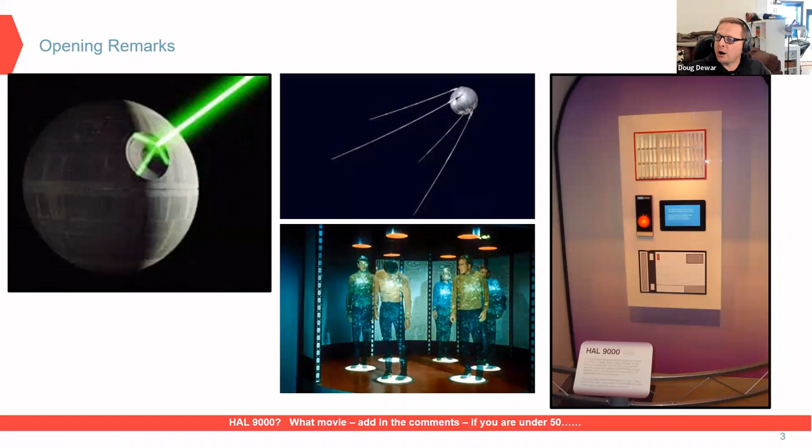There's been dramatic changes over time with geotechnical engineering. And I'm pretty lucky where it's happened over my career, because now we're harnessing the power of lasers, computing, satellites. And we can beam information all around and over the place now, so we may not even have to go to site.

Okay, so today's story starts back in 1956, when an engineer, Doc Hardy, was putting in a right-of-way for a new pipeline in British Columbia.

Back in the day, we did not have the understanding of landslides that we do nowadays. And particularly with new technologies, what we can see is amazing. We can actually see through the trees now.

So if you look at this, I'm sure if Doc Hardy had this information back in the day, this pipeline would have been routed around this deep-seated landslide. Just for reference, this is a couple kilometers long and a couple of kilometers wide.

Just to let you know, Doc Hardy's real name is R.M. Hardy. There might be an award or something. Apparently, he's slightly prestigious.

So let's go to 2019 now. I found it quite interesting where I'm out on a site with what I consider to be a very excellent engineer I work with, who's younger than me, as most people are nowadays. And he looked at me and said, 'How did you do it back in the day?' My reply to him is, we did a lot of walking and a lot of geotechnical theorization on landforms. Okay, now let's go to today.

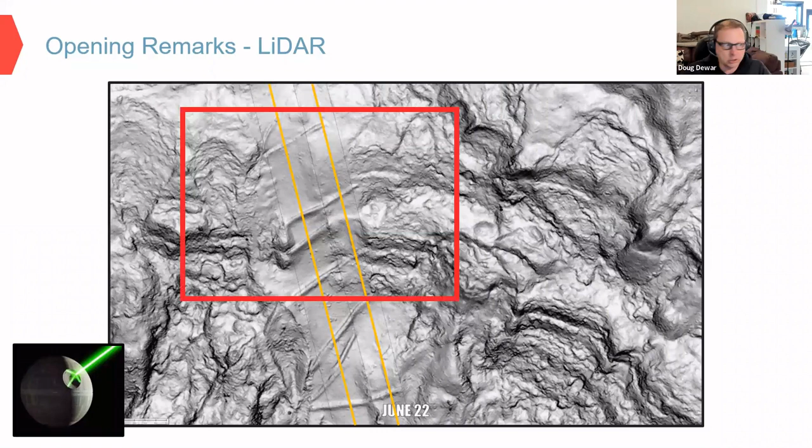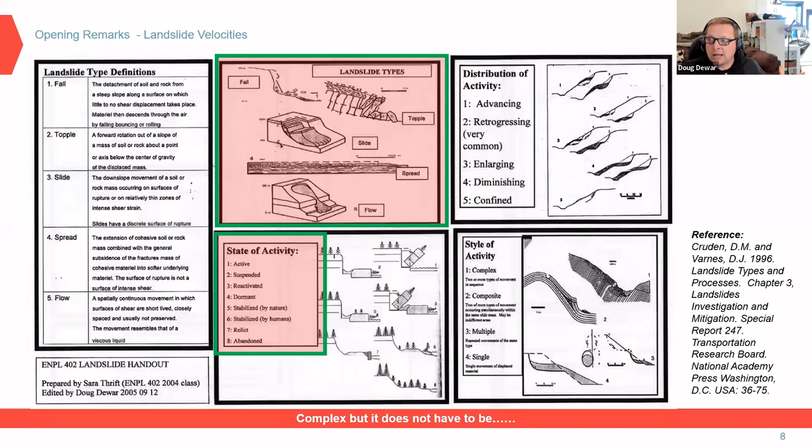So what's happened over time is we've shifted from a focus on whether we have a landslide and what type it is, to what is the state of activity of the landslide, using Cruden and Varnes 1996. So the question is: is it active or inactive? And if it's active, we're concerned about how fast it's moving, and for pipelines, the cumulative displacement over time.

Over the life of the pipeline.

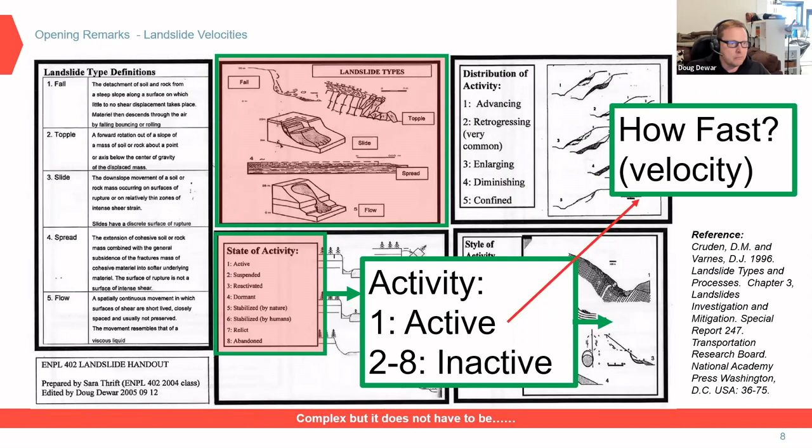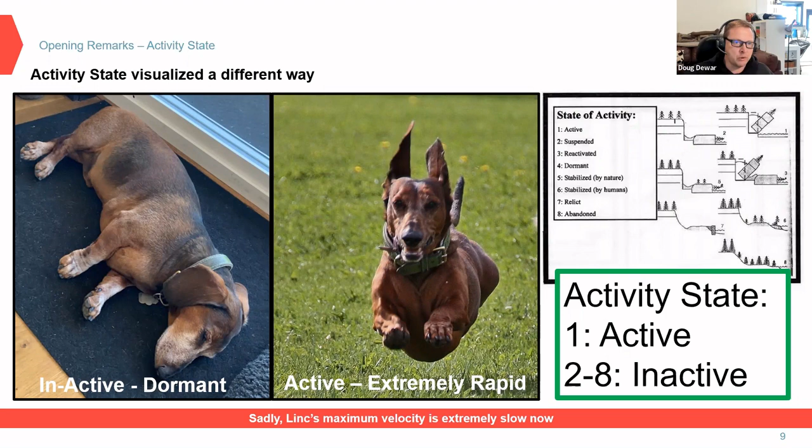As part of the big picture for this, I've come up with a soil-to-pipe landslide interaction classification system. The main elements are: do you have a non-interacting, exposing, or interacting landslide? And further to that, the main theme is whether these are maintenance issues or fitness for service issues.

Now, I'll point something out in the system: I put exposing in there because of regulatory requirements and regulatory compliance. Some exposed pipes may be fitness for service issues, where others are a maintenance issue.

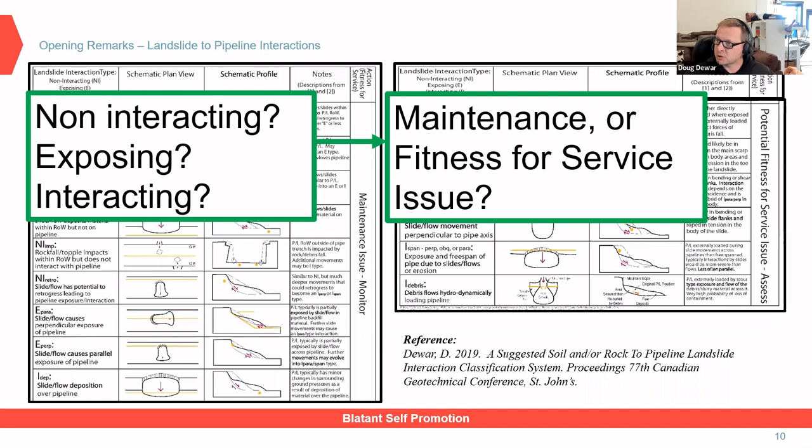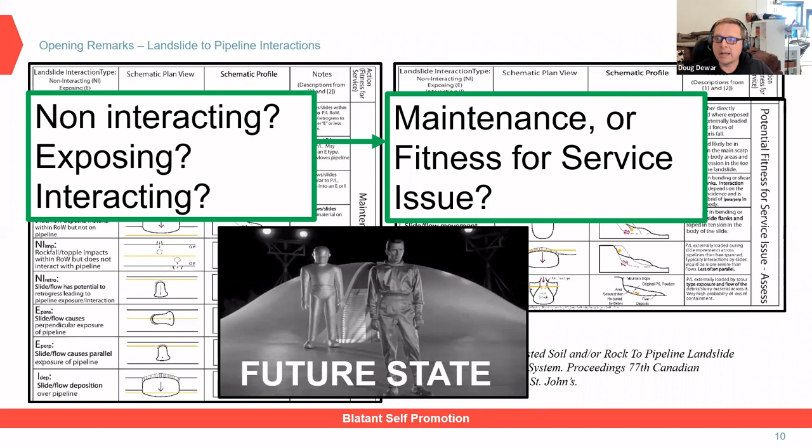And of course, within any system like this, you want to predict the future state of this landslide and its interactions with your pipeline as part of your geohazard management program. So I'm going to give you three examples, just to kind of warm you up a bit.

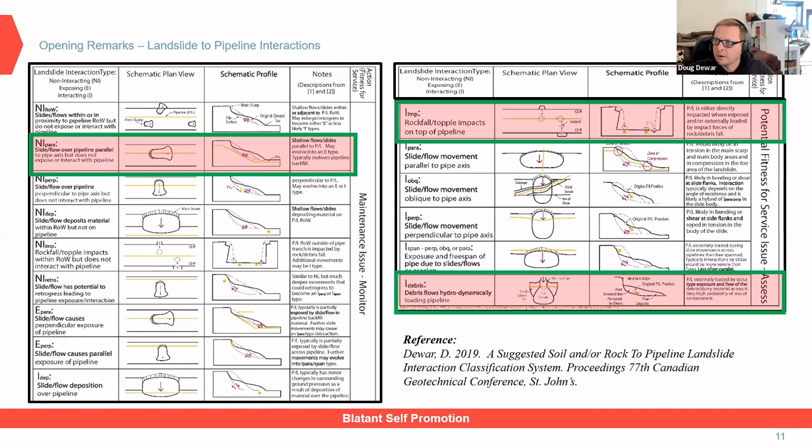In the first one, we have a non-interacting earth flow, residual soils in the Appalachians, where the landslide does not intersect with the pipeline, the slip surface is above it - likely a maintenance issue.

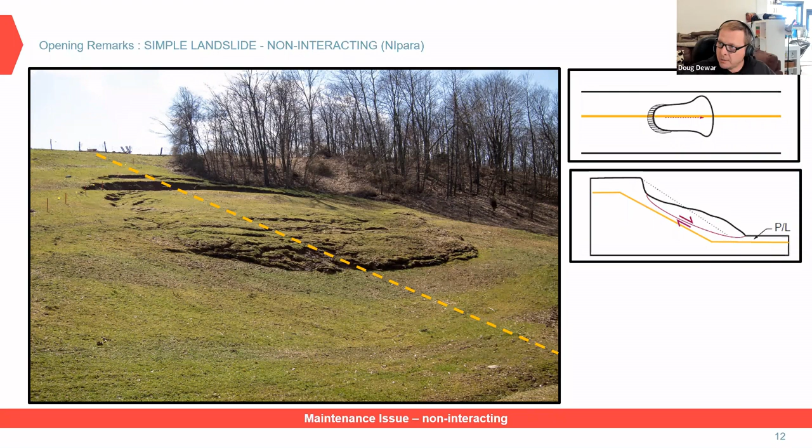Then we go on to this, which I call in my system an 'I-imp.' We had a rock topple, which you can see in the before and after photo here - left before, center panel after - where we've got deposition of a rock topple, which breaks up and hits a pipeline right away.

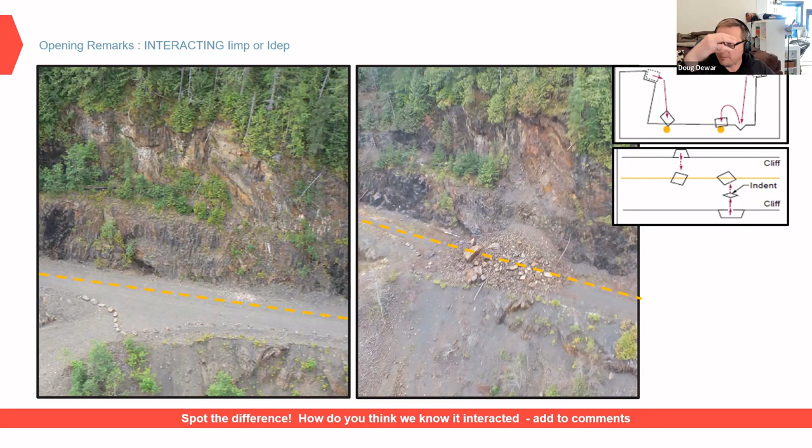Now, there's a little quiz for later. So if anyone in the comments knows how we would assess the fitness for service of this, just put it in the comments to see if you get it right.

And then of course we've got what I call an 'I-debris,' also called an IPA, or an interacting pipeline Armageddon event. So what you've got here is a rock slide up high in a mountain, which turned into a debris flow, which came down and ruptured the pipeline.

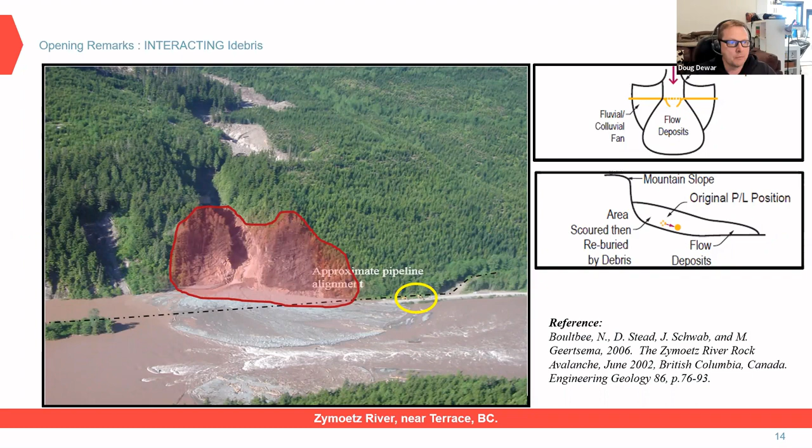Now, let's switch now to the focus, which is velocity. Really for landslides, it's the extremely slow landslides - the Cruden and Varnes example - or very slow landslides that we typically find pipelines in. Pipelines, duration based on velocity, can survive in these landslides for a certain amount of time. But for a conventionally buried pipeline, typically they'll only last for any time in an extremely slow moving landslide.

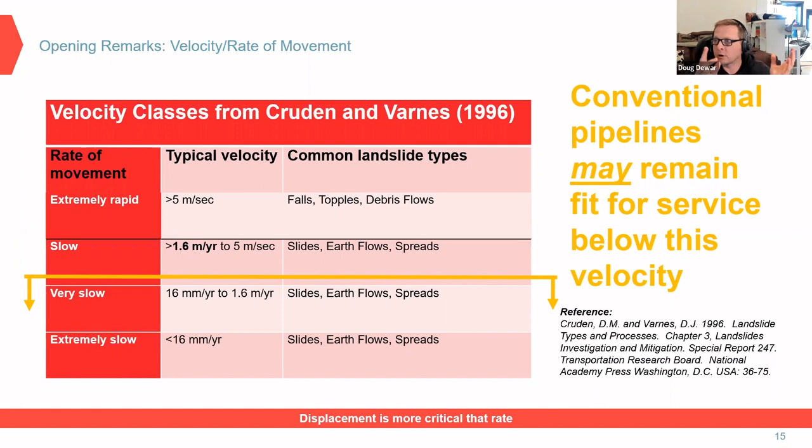And I think there's going to be some work done on this in the future by an engineer named Mike Porter of BGC, who's done some great work on this and goes into much more detail. I think hopefully it'll be presented at IPC this year.

Now, if we look at pipeline features - this is just for the non-pipeline people - it's pretty simple. Pipelines are made by having a flat plate of steel, which is then formed, and it's welded along the long seam. Then when it gets into the field, it's welded, and those are the girth welds.

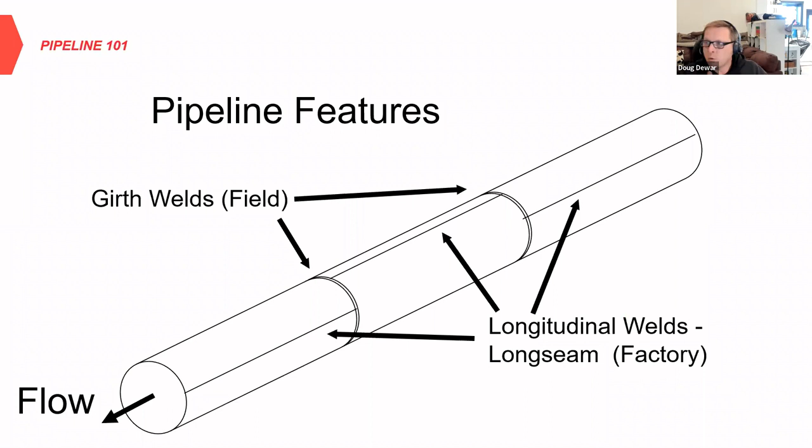Now, for those that are pipeline folks, I should mention slope inclinometers too. Kind of similar, where you have a plastic pipe, typically a 10-foot joint, and there's probably a billion different types of commercial connections for these. You put a probe in it, and you're basically profiling it using angles.

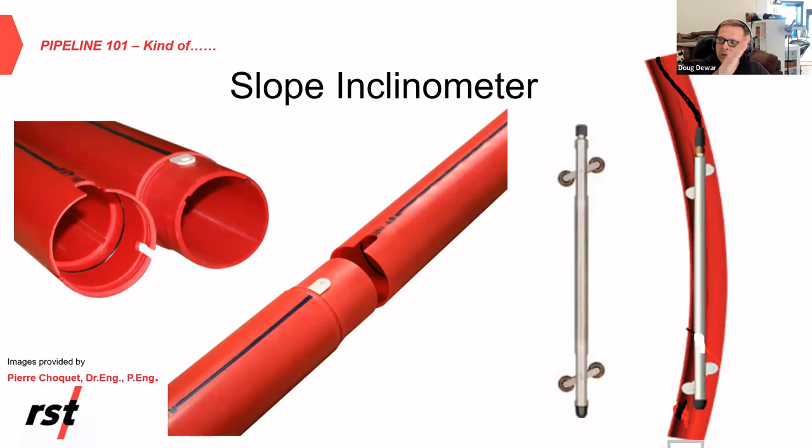Okay, so don't worry for the geotechs, I'm not going to really tell you what you already know, but I'm just going to give you my opinion on traditional geotechnical ground monitoring.

So obviously there's visual monitoring, there's subsurface technologies, mainly slope inclinometers, which I'm going to talk about quite a bit today, and surficial technologies, which are conventional or GPS surveys, LiDAR, and InSAR.

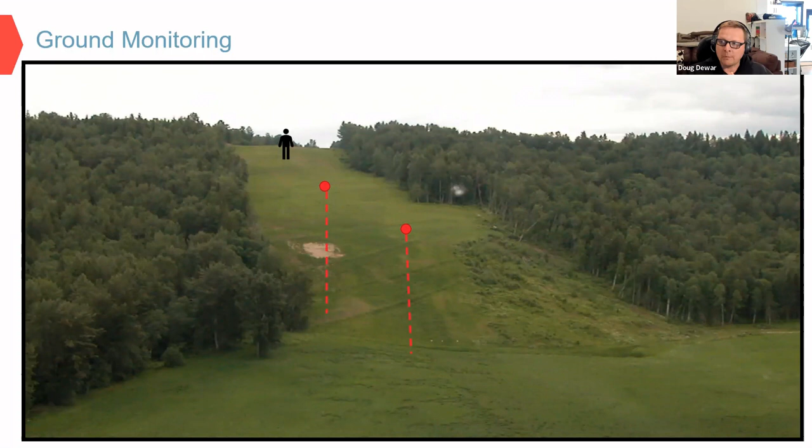So for those non-geotech folks, a geotech shows up at one of your pipeline slopes, and they can do some visual monitoring and walk around and look at the pipeline. Often they'll recommend putting in slope inclinometers to characterize the movement, and particularly the depth of the movement, and they get indications of the rate of the movement from the slope inclinometer.

And then what a lot of geotechs will do is put in surface survey monuments to give you more coverage on discrete areas of movement.

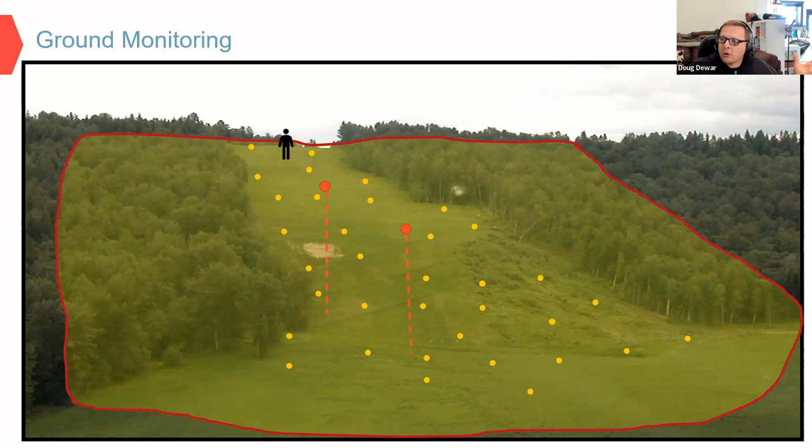And with the new technologies, we can scan an entire area with either LiDAR or INSAR to give us ideas of rates of movement over the broader area, and give us more indications of the slide activity over a larger area.

Just advice to all geotechs: nothing gets a VP's interest more than the photo of a split tree at a landslide scarp, okay?

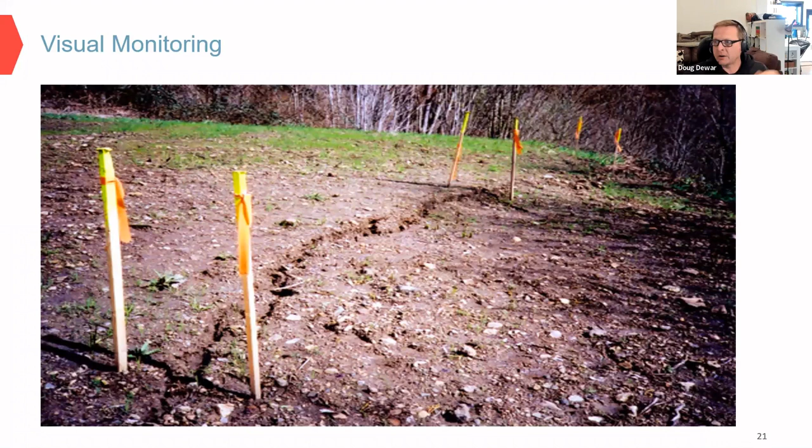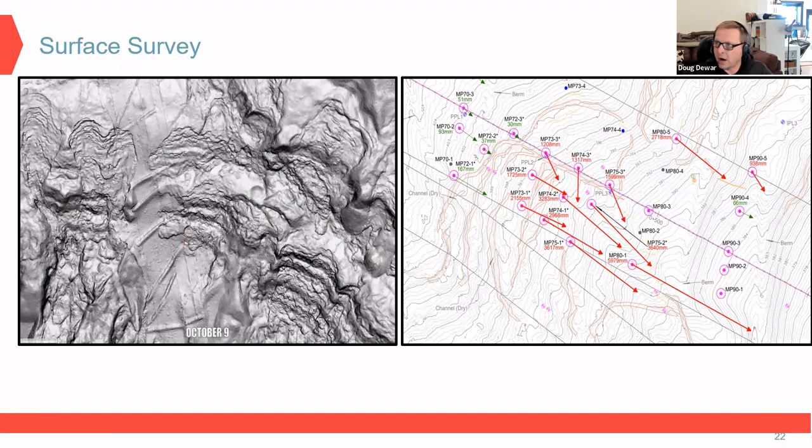Now, typical visual monitoring: put stakes down or whatever and monitor rates of movement. We've all done it and we'll all continue to do it. But now let's look at surface survey. If you look at the panel on the left, that's LiDAR; on the right, that's the surface survey of it, and it's providing very reliable results.

Here's an example of a large landslide complex, I think it was the RM Hardy one I was talking about before. You have clearly drift in GPS monitoring points in the right panel, and the left panel shows indications of clear movement. Here we got up to 620 millimeters of movement, with an average rate of about 2 inches a year.

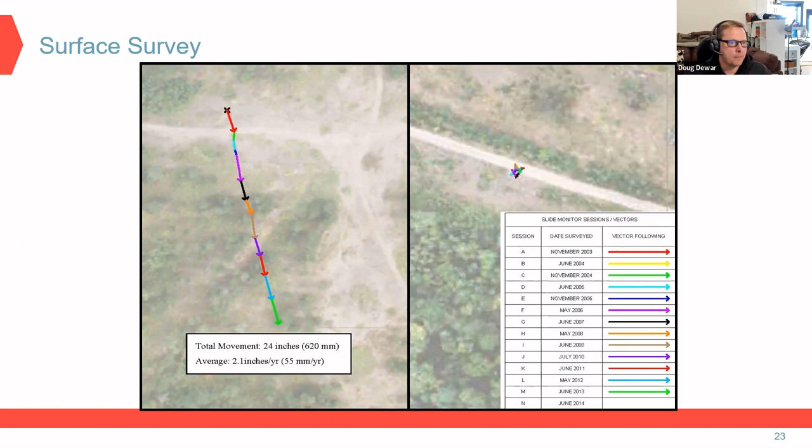So now the technology's evolved to the point where we can actually put GPS survey monitoring hubs real time, for pipeline applications. Those arrows on the panel to the left show real-time monitoring areas. This is a surface pipeline segment that was part of immediate risk control measures, as there was a landslide interacting with a pipeline. This is a temporary measure waiting for an HDD to happen.

If you look over to the panel on your right, what you actually see is the GPS survey monitoring hubs, near real time, monitoring the structure and the pipeline.

Oh, don't want to do that.

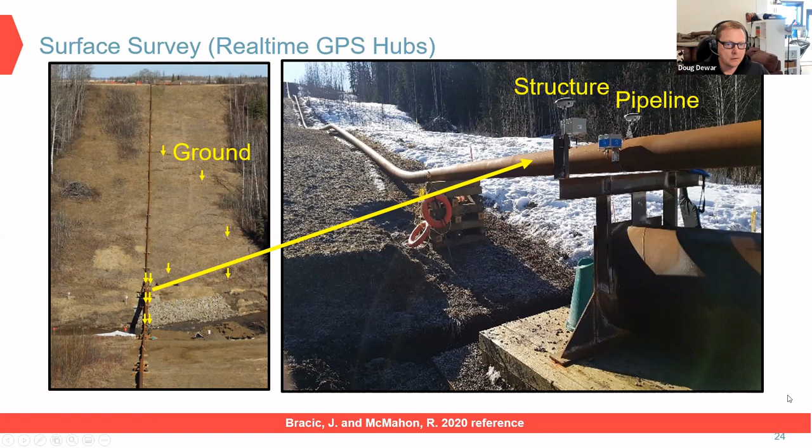Okay, so now I want to make a point about surveying to the geotechnical audience. I think there might be a little bit of surface survey hesitancy amongst some very senior geotechs, or amongst us all, because I don't know a geotechnical engineer over the age of, let's say, 45 that hasn't been burnt by a surface survey type monitoring installation in the past.

But I want to put it in a pipeline context for you. Basically, your strain capacity of your pipeline, based on my experience, is going to be an absolute minimum of 1 to 3 diameters of movement of your pipeline when buried in soil.

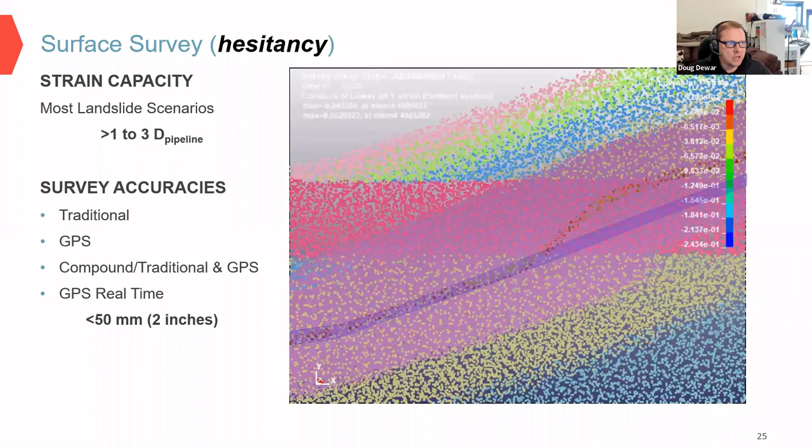Okay, let's talk survey accuracies. Whether it's traditional, GPS, or compound - meaning you have to use traditional and GPS together because you can't get the horizon for your satellites to completely go GPS because of trees, etc. - and GPS real time, worst case is you're going to get an accuracy of plus or minus 2 inches. Now remember the strain capacity of the pipelines.

The surface survey pin is a 3/4 inch sucker rod, 6 feet long, hammered in by some gorilla, not me. And it goes from 0 to 1 meter. The pipeline's buried at 1 meter. So what's closer to the interaction, the SI or the monitoring pin?

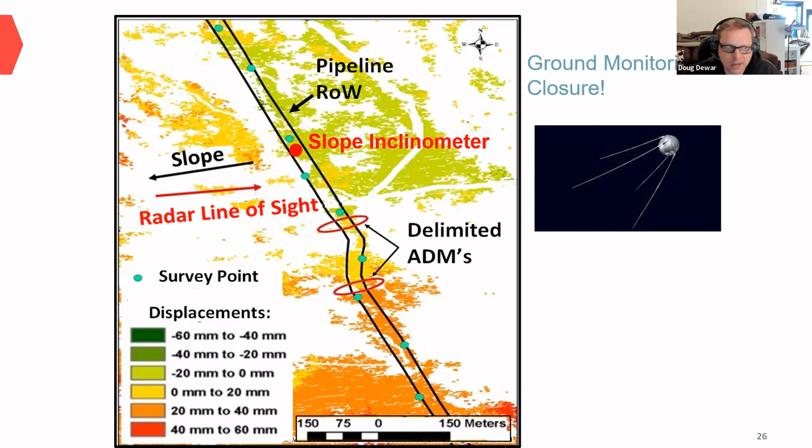Now, let's switch gears to pipeline. There's been rapid changes in pipeline over the years, and a lot of it has to do with magnetism. The first main tool that came in, let's call it the magnetic flux leakage tool - not part of this talk - allows you to scan the steel of the pipeline to determine its thickness for corrosion, with limited application depths.

Then what's happened over time is we've got a newer, younger form of interpretation of magnetism, which has allowed us to develop axial strain tools, which I'll talk about. Then, of course, this all feeds into the state of practice today with smart pigs, and of course computing power. Finally, what I'm focusing on in a lot of my research and work is cruise missile technology, or the LN-200, which we incorporate into pigs.

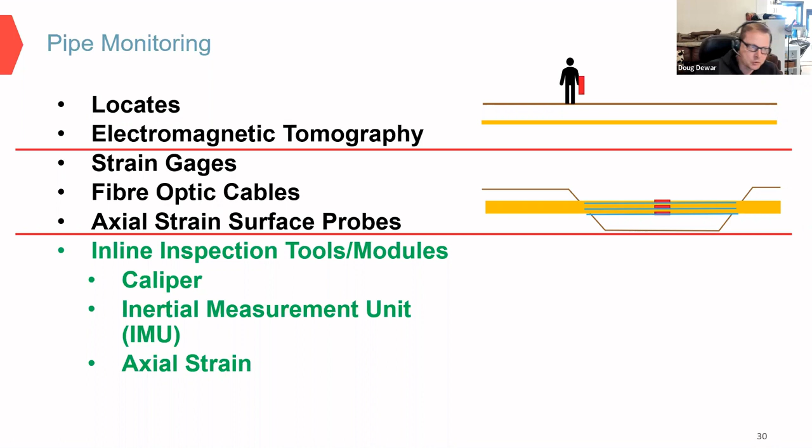When we're looking at pipe monitoring, there's three basic subtypes. You can do it from the surface, either through locates or electromagnetic tomography. Next is when you dig the pipeline up and attach something to it or measure something, like strain gauges, fiber optic cables, or axial strain surface probes. Next is what I focus on, which is ILI tools - caliper tools, inertial measurement units or IMU, and axial strain tools.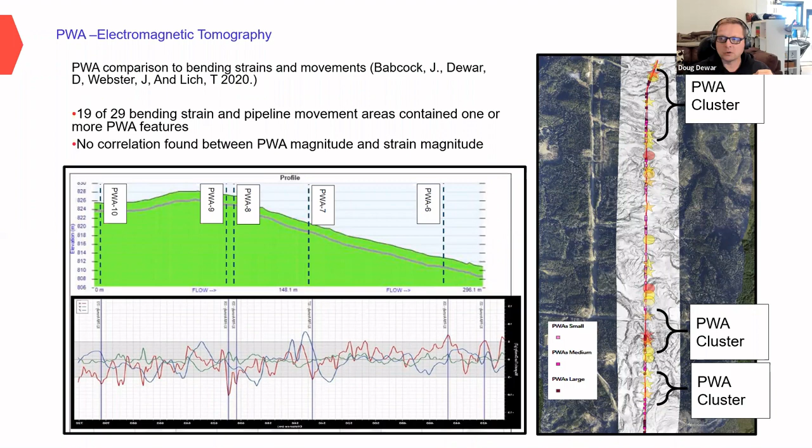There's a paper by Babcock, and basically two-thirds of all electro or bending strain features, which I'll talk about in a bit, correlate with pipe wall assessment features. I should mention too, there's no correlation between the magnitude of pipe wall assessment features and bending strains.

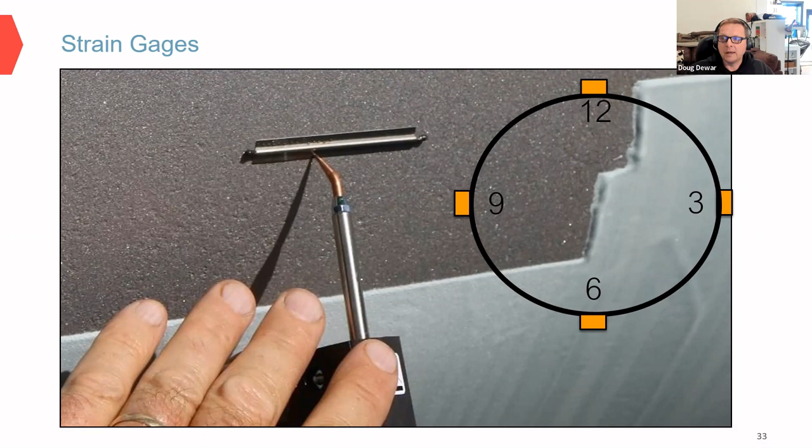Next is strain gauges. These are something you put site specific on a pipe once you dig it up, and these are vibrating wires. There's various technologies for them, but they typically are around 2 inches long, and you have to have some expertise in locating them. They're typically put at either 12, 3, 6, and 9 across a pipe, or at 12, 4, and 8 o'clock positions.

Here's an example of a photo of a welded installation - that's done by me, of course. One of the advantages of this technology is that any painfully average engineer can implement this, as evidenced by my 2016 paper on this. So I've looked at probably hundreds and hundreds of interacting landslide data on strain gauges, or individual installs.

The data completely makes sense and is completely reliable. The main issue with it, though, is when you put the strain gauges on, that's the starting point - you don't know where you're at when you start monitoring as far as the stresses and strains in the pipeline. So it's a useful tool, but it's got to be used very carefully.

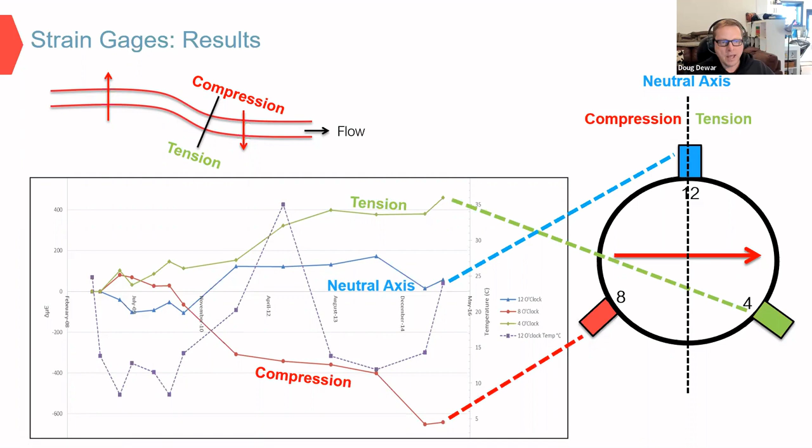Now, here's an example of a pipeline being deformed, and you can see up here there's compression and tension in the upper left panel. The results are shown in the lower left panel, and it makes sense. The neutral axis is at 12 o'clock where it should be, tension's at 4, and compression is at 8 o'clock. Everything makes sense.

Okay, now this technology can be augmented if we use structural fiber optic cables. The advantage of these is you get near continuous strain data on a pipeline when you set up structural fibers at whatever position you assign to them, and you can interrogate them over large distances. For normal fiber optic installations from a point in, you can interrogate 20 kilometers upstream and down - it may be less for discrete fiber optic strain gauges.

But the point is, like I showed you a 4 kilometer long landslide - the longest pipeline I've ever seen in a landslide is, I think, around 4.5 kilometer long section. So this technology can be worked, but we need more research about this, and I find this very promising because opposed to strain gauges, you don't have to use any judgment when picking where you install them.

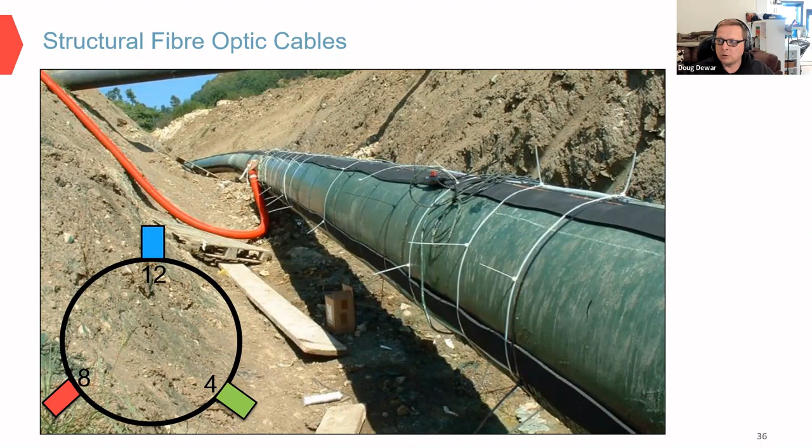Now, the final in-ditch technology I'll highlight, and I won't get into too much detail here because I'll discuss it in the Axial Strain tool, is that you use what's called the Villari Effect, which is basically electromagnetic permeability. It's pretty simple - if a pipe's in tension, your electromagnetic permeability increases. If a pipe's in compression, it decreases. Then what you do is you bench test a pipe sample in a 3-point loading to get the strains, and you can correlate it so you can actually determine the state of strain in a pipeline at each measurement area.

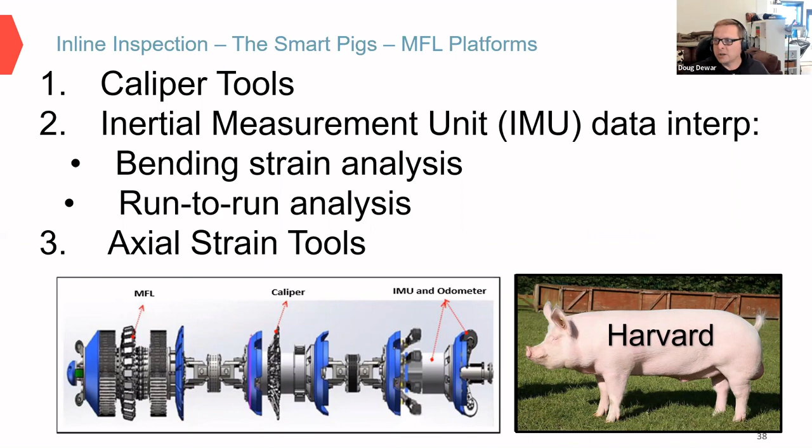Okay, now here's my favorite part of this - the ILI IMU and the internal stuff, which is what I've focused a lot of my learnings on over the last 10 years of my career: caliper tools, IMUs, and axial strain. And I'll mention with ILI IMUs that you can do an initial run, kind of like your initial run on an SI, and then you do run to run and compare it, just like an SI.

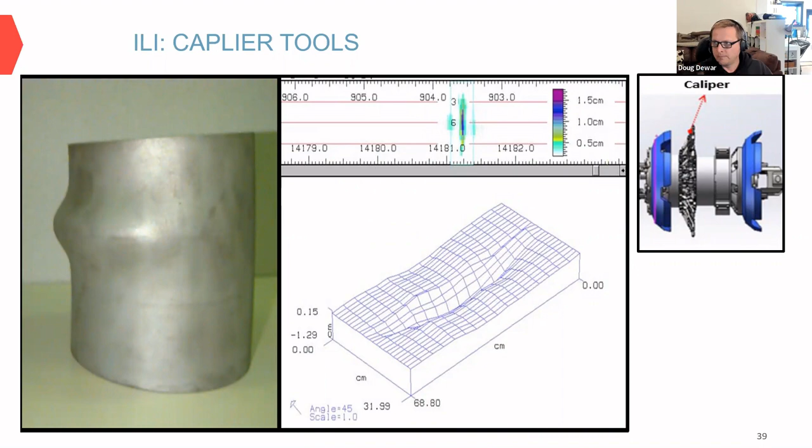So here we can see a wrinkle detected by a caliper tool. Here we can see that rock fall earlier that I showed you, which was assessed for fitness for service using a caliper tool. The before rockfall panel in the lower right shows the signature before the rockfall, and then you can see it after the rockfall, and it induced 3% ovality into the pipeline.

The good news is you start getting nervous and start assessing things at approximately 6% ovality. This pipe was essentially saved by the fact that it was buried in a blasted bedrock trench quite deep.

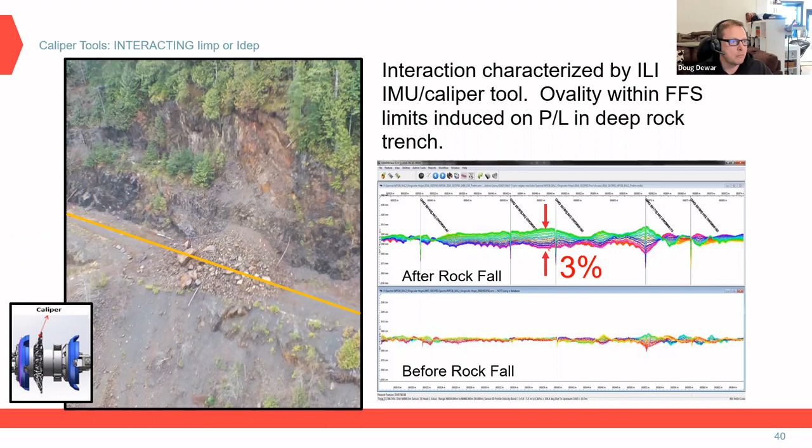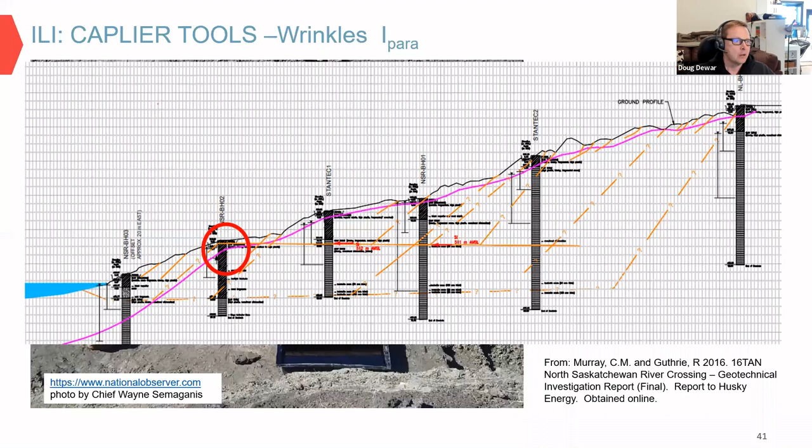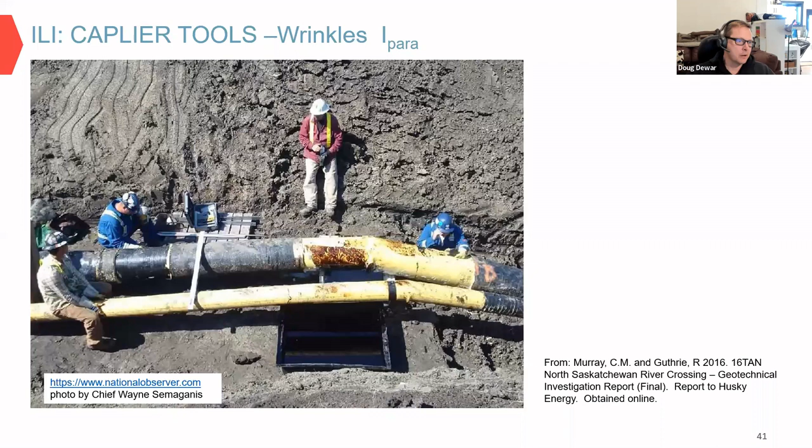Okay, now, if there's one thing I'm going to teach you in this talk, or you should be concerned about, it's wrinkles. It is basically the last gasp of the pipeline before a loss of containment in a landslide. The example here is taken from a report on the 16TAN landslide, which everyone can research on the internet. We have a wrinkle forming at an overbend where an HDD enters the ground in an active translational landslide. The wrinkle is right in the center of the panel.

I will reiterate, if you have pipeline, wrinkle, landslide in the same sentence or conversation, you need to do an immediate assessment, period. And also you need to consider taking immediate risk control measures based on the results of that assessment.

Now, let's look at the fundamentals, and it's real simple about ILI, IMU, or pipe shape determination. Pipeline girth welds are welded flush on straight segments of pipeline.

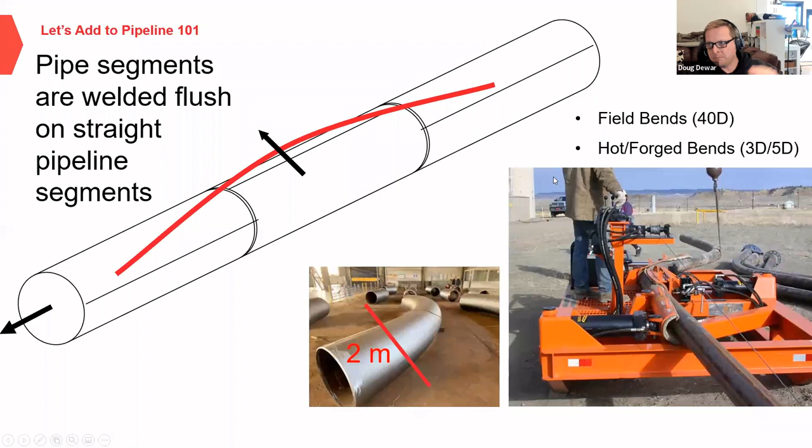If you look in the image, you'll see a bending machine to your far right, and in the center, you'll see a forged bend from a factory or a hot bend. Typically the signature, or what you do, is you leave 2 meters of straight section at the end of the bend. And if you see bends across a weld, obviously something's going on.

So I'm not going to get into the mathematics of all of this for everyone's sake, it's lunch, but I don't have to because Hart et al. in 2019 does a wonderful job of explaining everything you need to know about ILI and IMU data and how it's derived. But typically what we're getting is the pitch, the azimuth, and the odometer reading on a pipeline.

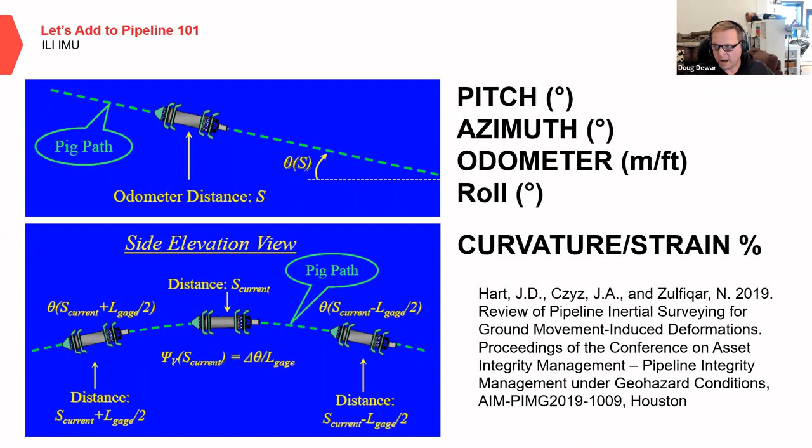And then of course, this is a function of the roll in the pipeline, and they correct for it. And then what you can calculate is the curvature of the pipeline from this data, which is commonly referred to as strain. If I show you a typical display of output from our software, you're looking at a plan view elevation, horizontal strain, vertical strain, total strain. Remember, strain can also be considered curvature, along with the azimuth and pitch.

And particularly in areas like, for instance, applications in the Appalachians or anywhere where you're concerned more about horizontal movement across a pipeline, you can also do an out of straightness plot, which is a very good indicative tool to tell you may have an issue.

So in my attempts to further advance this, in 2020, I proposed an ILI-IMU classification system, which I'm further revising right now through learnings and collaborations with other industry SMEs. It's based on feature source, feature type, and feature activity.

And the one thing I'll point out to you is that regardless of the analysis you do, the majority of features you find are due to ILI features, which means some sort of reaction of the pig to a feature in the pipeline, like a proud girth weld, a wall thickness change, or a really tight curve, or due to maintenance activities such as integrity digs. And most of these features tend to be inactive over multiple runs.

Now, let's go back to the founding of ILI-IMU analysis, and that was in 2004. So the technology's been around for a while, in the pioneering paper by Czyz and McClarty. At a site called Daniels Creek, they noticed pipeline movement in a run-to-run analysis which was 1.5 meters. And then when they looked at the pipe shape, they determined that this 36-inch pipe had experienced at a landslide flank 4 meters of displacement over approximately, let's say, 50 to 60 years.

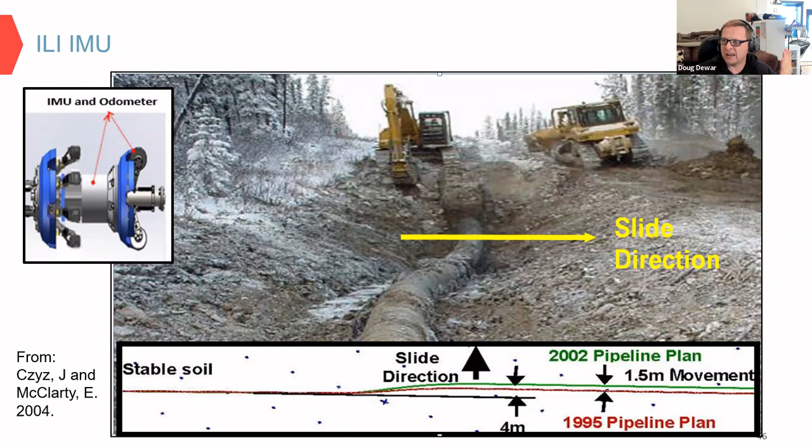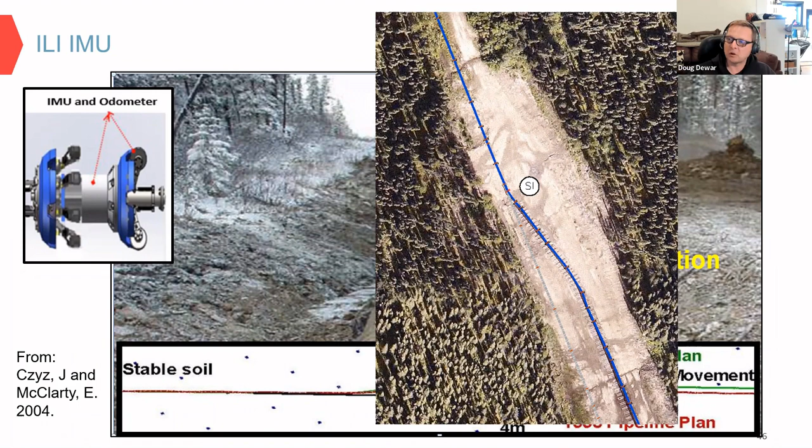And just to let you know what they did as part of this, McClarty and Cavers are sort of a pioneer of this. It's not referenced in here, but it involves putting in surface pipeline segments so that the pipe is basically surfing on top of the movement on wooden skids.

So let's look at another example where we have a landslide. Initially, it's interesting because it's where geotechs have to talk to the pipeline vendors more. This movement was not initially detected because it didn't meet the criteria of the bending strain analysis the ILI vendor did. But when we looked at it visually and explained the landslide mechanics to the ILI vendor, they quickly pointed out that over 17 meters, we had 1.8 meters of displacement on the flank of the slide.

And I'll tell you, in subsequent analysis, this movement was picked up. So what I want to point out here is we've got a 30-inch pipeline on the right of the image and a 12-inch on the left. You'll notice that pipeline stiffness has a significant component when you're factoring out your soil-to-pipe interactions. The bends are much tighter on the 12-inch.

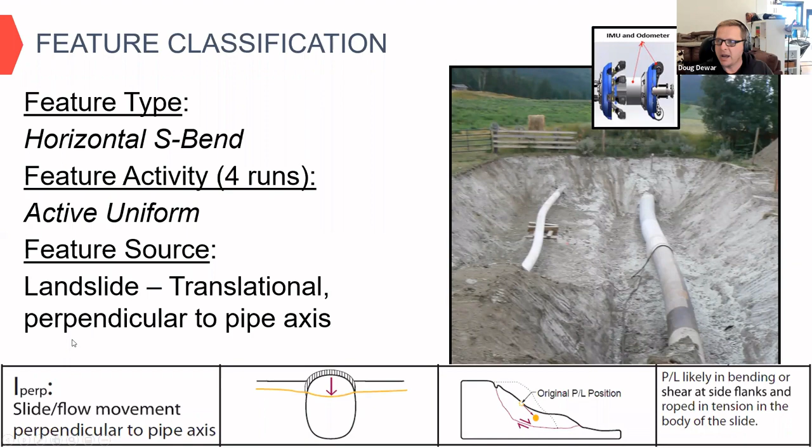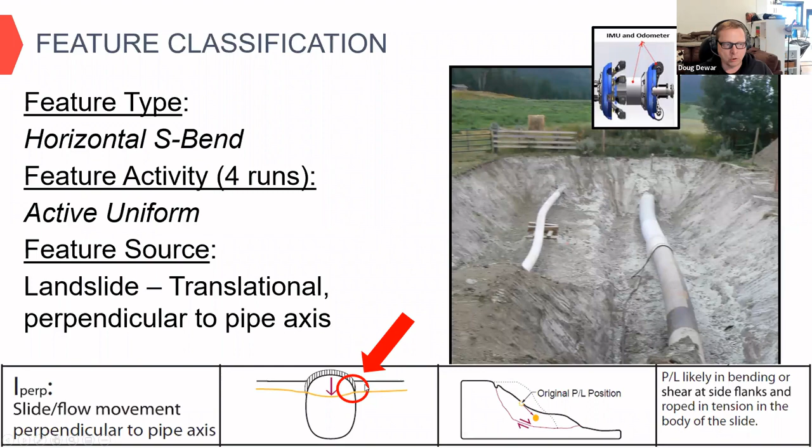So when I classify this feature in my system, it's a horizontal S-bend, active, uniform rate of growth in the feature based on 4 runs, and it's a landslide, translational, perpendicular to the pipe axis. And according to my landslide classification system for soil to pipe interaction... let me go back here, or the operator. That is what we're looking at right there on the flank of a landslide.

So let's go to a more complex example now, where we have a pipe which has been strain relieved multiple times in a valley, where one side of it—if you look at the panel to the upper right—on the northwest side is moving, and the southeast side is not. So we do strain relief on the northwest side.

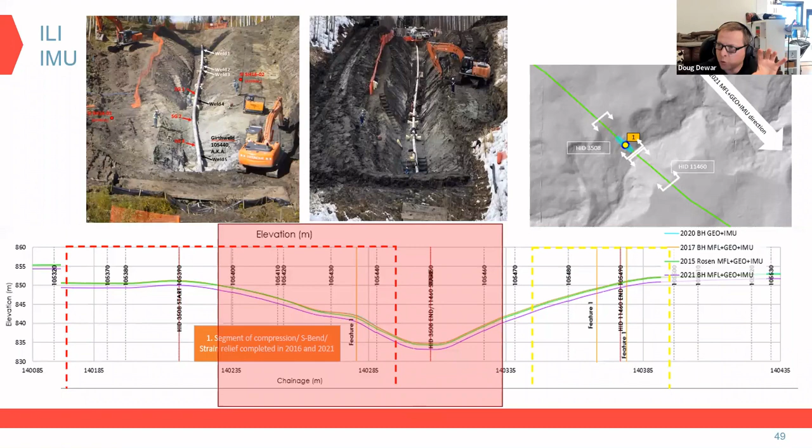And we're going to look at this area in more detail on the future slides. So I don't even need to do any plotting to tell that there's an issue here, or that there's deformation of the pipes. So if you look down at the pitch of the pipeline—trying to see here if I can put the laser pointer on for this.

Okay, normal bends have a uniform rate of curvature. So if you picture the pig changing pitch, it does it at a uniform rate, and you end up with what's called ramp functions that define your bends in the field. You can see that over here on these smaller field bends. And then in here, it's almost like these ramps have been melted. That gives you an indication that the curvature is not constant on the bends, which indicates some sort of interaction. Now that pitch is in the vertical direction, just to let everyone know.

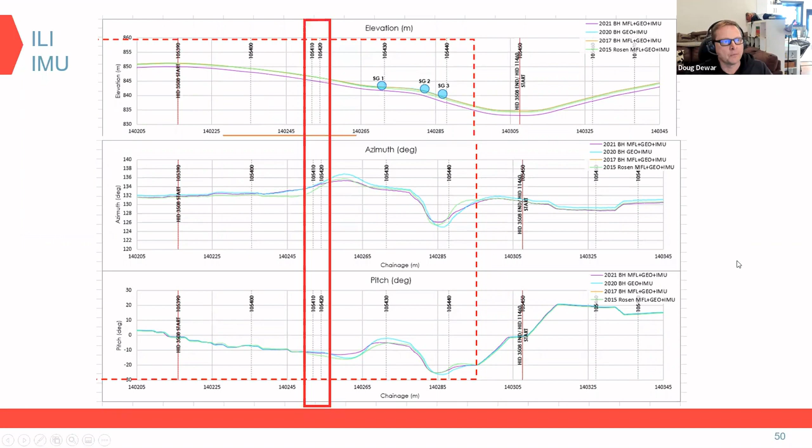Now, if we go up here to the azimuth on this too, we can see that horizontally, pipelines are typically put in straight. This is not straight—there are changes also in the azimuth if you look at the plots. Now, let me turn off this tool. I wish there was a quick way to do that. Okay, and go to the next panel where we actually look at the curvatures on the pipe.

And one of the diagnostic features is, if you can see my cursor here, the lower right triangle—you can see that there's a weld with a bend right across it. That was not installed in the field that way, or I hope to goodness it wasn't. Put everything together, and you have a landslide interaction.

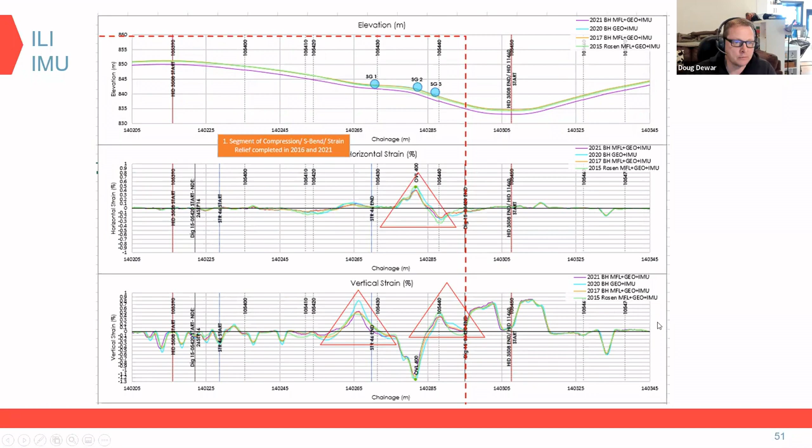So when we look at the ILI-IMU on this, the point I'll make is, now we're not looking at the pitch so much as we're looking at the azimuth, which means the heading of the pig as it goes through this section of pipeline. And what you're going to see is the pipeline is slowly turning right and left as it goes through this landslide interaction. This is clearly indicative of something going on.

According to my landslide classification features, it's a segment of compression, it's clearly active, and it's caused by—because we also did strain relief here—landslide and stress strain relief. It's a dual symbol for the source.

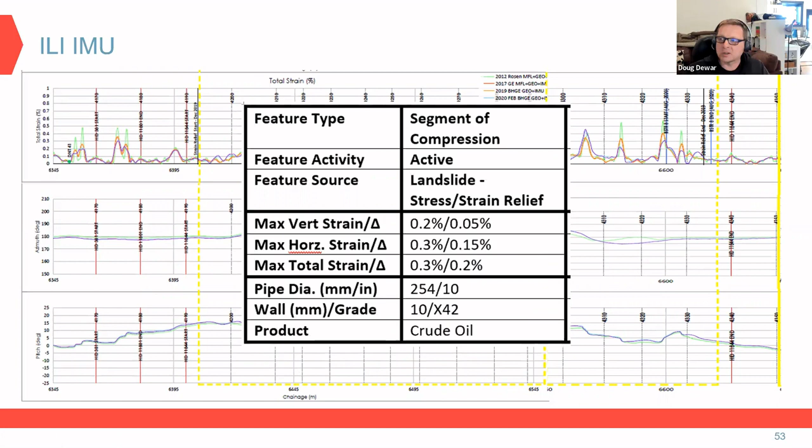My final example is on a slope up near Fort McMurray, where it's a complex landslide layout. We have three types of landslides: superficial flow/rotations in colluvium, then deeper seated translational type slides in colluvium, up to 7 or 10 meters deep where there are deeper pockets of colluvium. And then in this Cretaceous Clearwater formation below, which is a clay shale, you have deeper seated translational landslides.

So if we take a look at this, we can clearly see all the scarps in activity, and we're concerned about an upper zone, if you look at the panel to your left, and a lower zone. And if we look at the actual plot, we can see the upper and lower zones, and it lights up like a Christmas tree when you look at the horizontal out-of-straightness, the bumps. This is indicative of small, shallow flows horizontally deforming a pipeline. There's also, because it's going down, vertical deflections.

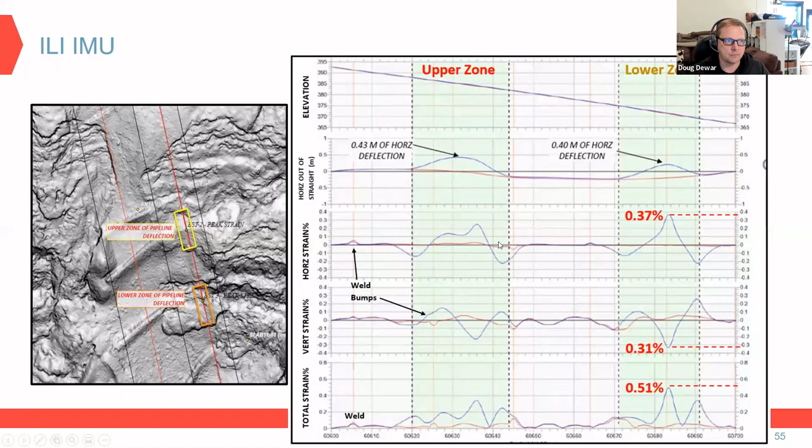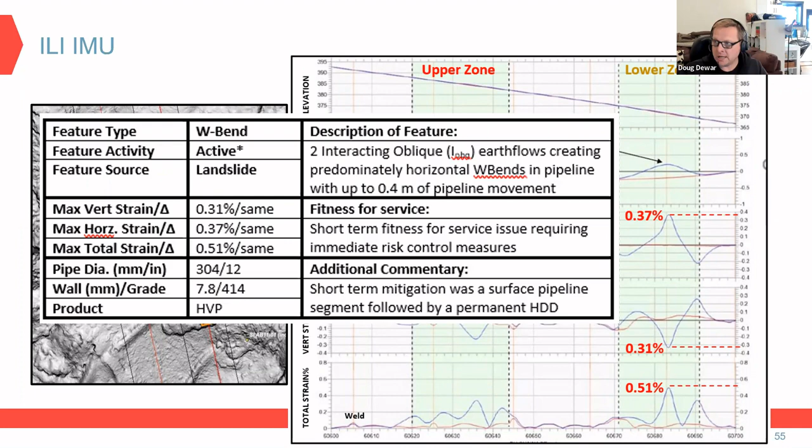And the classification of this is a W bend. It's clearly active, and it's clearly due to a landslide, there's no doubt. In this case, the operator immediately went to risk control measures and installed a surface pipeline segment. And then, as time progressed, they put in an HDD to provide a permanent hazard avoidance mitigation option.

I cannot describe to you how actually loud that was. You could see that I actually had a reflex reaction when that pipeline popped. Now, this pipeline obviously has no pressure or product in it. And you heard me say 25% during that. What I meant was that when it tore apart, the cut around it was 75% through, so it sheared through 25% of the wall.

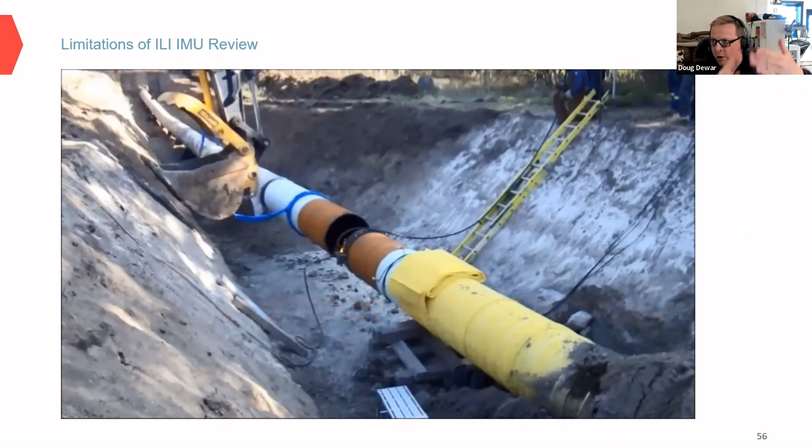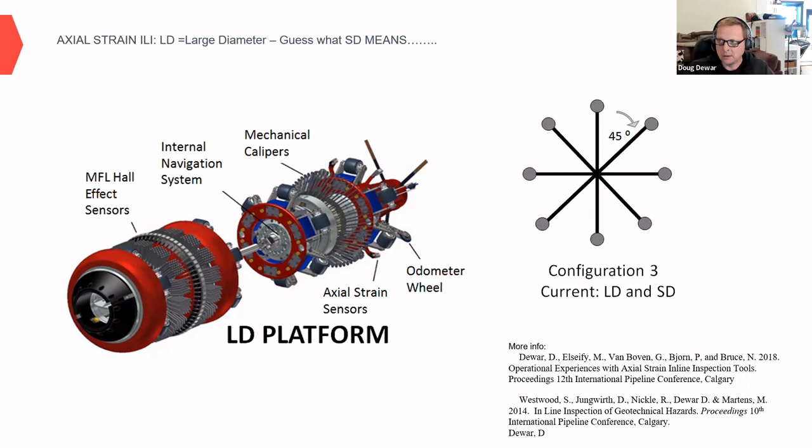Also, ILI-IMU, because there's little shape change, won't identify pure compression on a pipeline either. So what do you do? Well, the key to that is a developing technology called the Axial Strain tool, which is a proven technology, but I would say we're still developing the ultimate application of it. Right now, it's basically 8 of those stress probes I showed you before, in a pig on arms, that measure the state of strain in a pipeline.

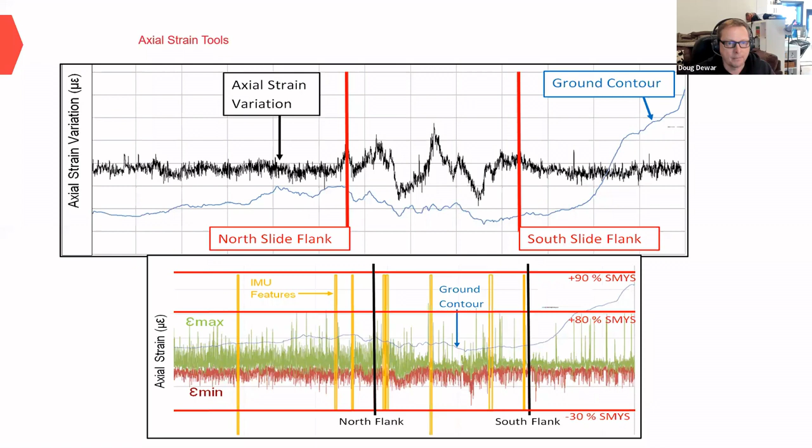So how does axial strain fit into the big picture? That previous panel I showed you wasn't complete, because what you do is add an axial strain panel right at the bottom, which gives you your tensional and compressional results.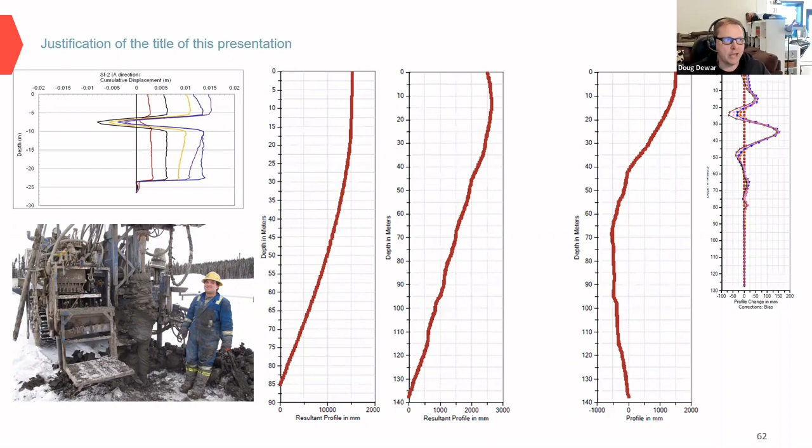So I asked some industry SMEs to provide me with some SI, absolute position and/or profiles. So what's this got to do with pipelines? Say I take these, turn them around, and turn them into a pipeline. Pretty similar, don't you agree?

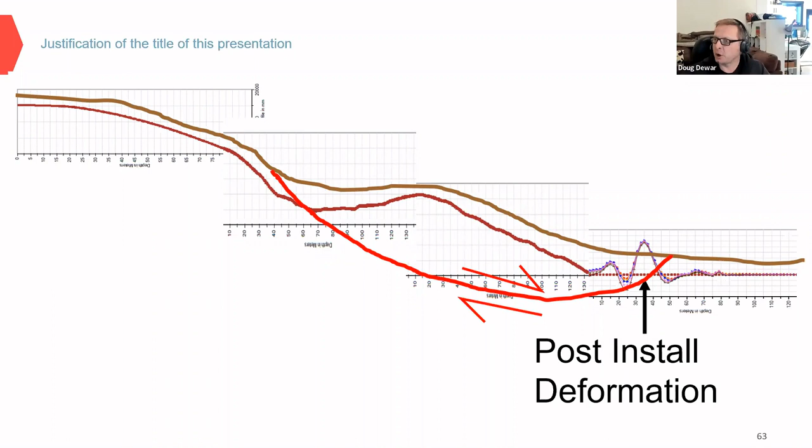Then what I do is put a ground surface, a landslide, and some post-install deformation, and I think we've got a pretty darn good analogy.

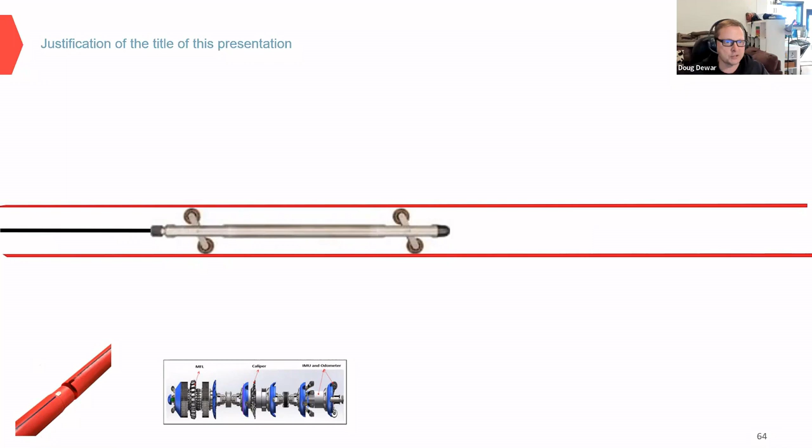Okay, so let's look at our little pig here and try to get some correlations going. Your azimuth and pitch typically will be equal to your A and B direction, just rotated. And then the roll of the pig is equal to the spiral in your casing. Your probe length is 0.5 meters, which may be similar to the actual pig length that the ILI-IMU is incorporated into.

But where it changes is when you get into data collection. ILI-IMU, depending on the velocity of the pig, essentially the slower it's going, the more data you get. You can get data down to, let's say, 2 centimeter to 20 centimeter resolution.

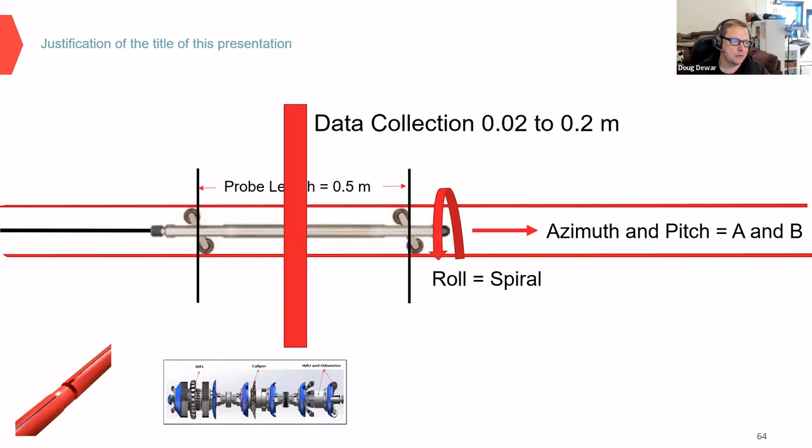So I'm going to take a detour sidebar on this now. In SIs, essentially, we have a gauge length. And what we're doing right now in geotechnical terms, if I superimpose how we read SIs, is we pull it up, and the gauge length is also your sampling interval. So what we're essentially doing is measuring and summing angles. See where I'm going with this?

So what can happen now is, if that's the SI gauge length, we could actually change the pull gauge. I can see right now that a lot of interns, summer students, and junior engineers are cringing. But of course, you'd only do this over the slip surface, and this is academic.

And then you could also shorten the length of the pig. What that would allow you to do is, rather than measuring angles, define curvatures in your SI casings. I just want to do this over slip surfaces.

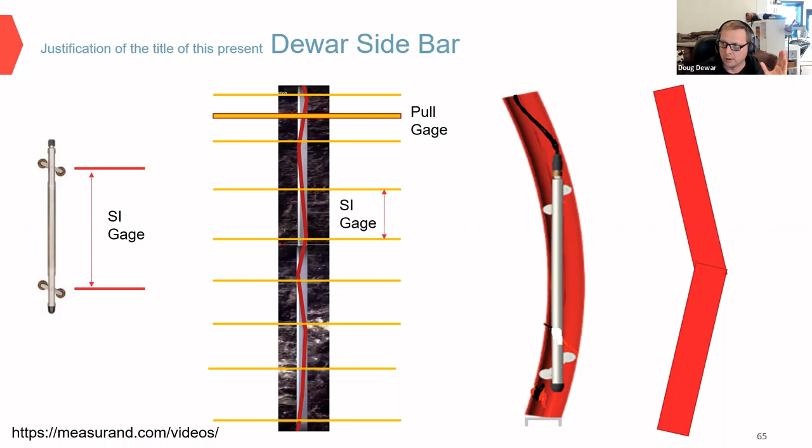My point is that, and maybe someone will correct me on the call about this, our true understanding of what's going on when we can no longer pass a probe in an SI casing is fairly limited. We say they're sheared, but they could be blocked or pinched, which I'll show right here.

Now, the other thing is, as part of that, if you're defining curvature, if you look at the final profile of an SI, no matter how much measurement you do of curvature, you can never define a miter bend or a pure kink.

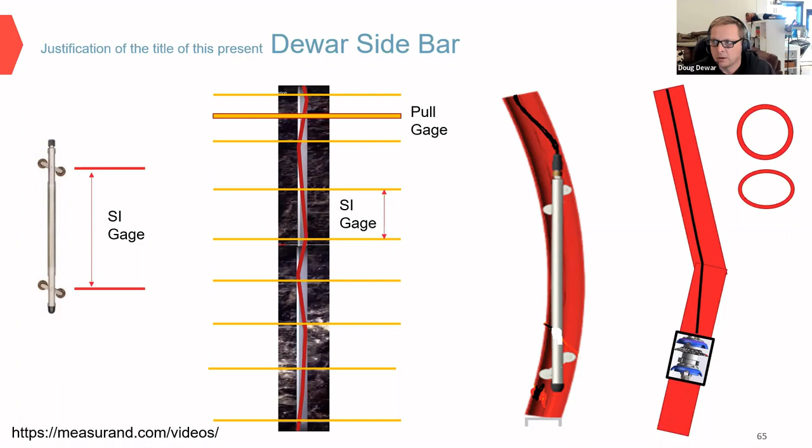So what you could then do is apply ILI-IMU type caliper technology for small diameter pipelines to look at these. Like I said, this is academic, but it's just an interest subject of mine where I don't think there's a lot understood about this. And if we're curious, there's an opportunity here.

Now I'm going to get to the vision statement and all that. Okay, so right now we have geohazard management, and we have some great tools for this, and some really good knowledgeable SMEs. We have ILI data analysis, which is partly what I'm talking about right now, and the integration of these with pipeline records and data, incorporating them. I'll explain that in a second.

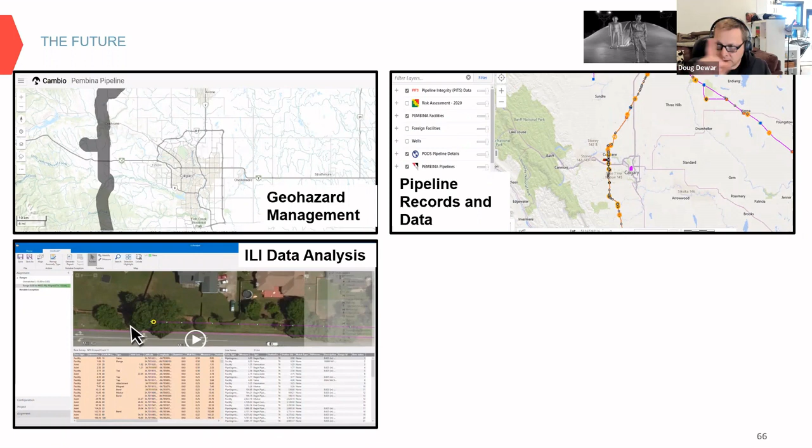What I haven't mentioned in this talk is the rapid evolution of these axial strain technologies, our pipeline mechanical, structural type engineering, and incorporation of detailed finite element analysis models. One day, maybe in 20 years, I think we're going to have a complete scan tool that goes through a pipeline and pretty much does your fitness for service assessment for you, with very little judgment required, other than when anomalous conditions occur.

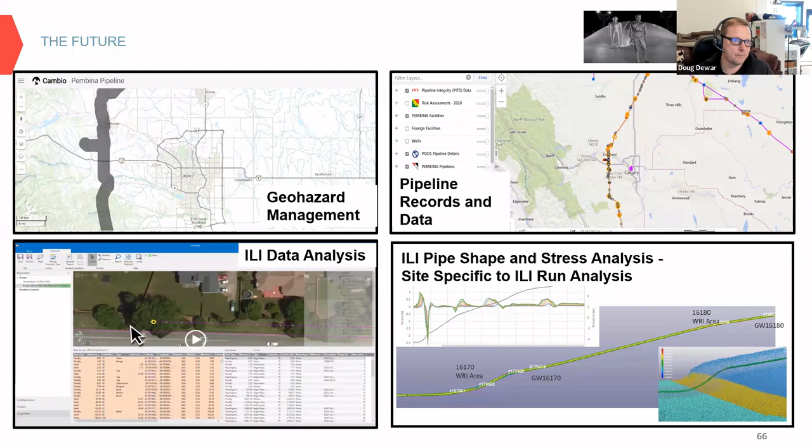And of course, there's the smart computers that'll have to put this all together because our brains can't handle this. But people ask, why are pipeline records and data so important?

Well, that comes back to construction and ILI-IMU features. If you look at this, I looked at 177 bending strain features as part of looking at the axial strain data for a paper. I only found that 2% of the actual features were landslide related.

Now, the mother of all studies was done by Terrio et al., where they looked at 4,600 features, and over 90% of them were construction related. Okay, so that says a lot right there. Company records are very important to help weed out the chaff, so to speak.

Of course, there's smart computers that have to be involved in this too. Now, let me give you an example of this. We've got a pipeline segment which crosses, and there's two landslides on this slope.

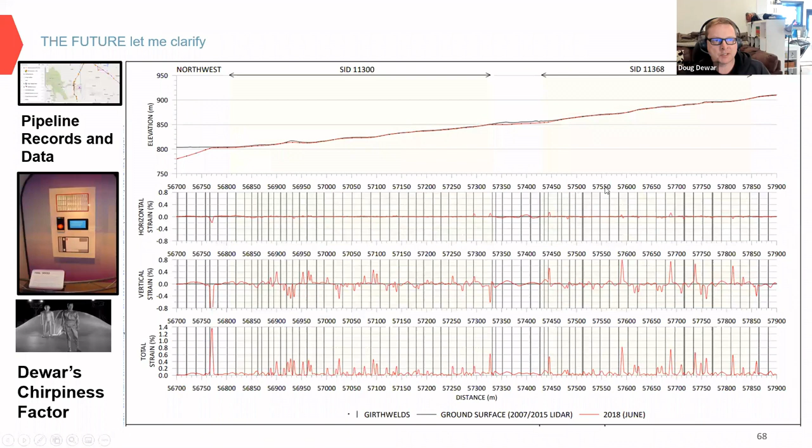And there's an area with horizontal anomalies situated between the toe of one slide and the scarp of another interpreted slide. But if you look at the company records and the image, it's pretty clear that this is a road crossing.

So in a single run, the question is, are these strains due to a road crossing or soil-to-pipe landslide interaction? In this case, I'm pretty sure they're due to the road crossing, because field crews like to tie things in. But if you had photos and records of the actual crossing construction, that would help you.

Of course, the only way you can concretely verify this is a run-to-run analysis to confirm that the feature is inactive, or if you monitor the landslide to confirm its activity. But then again, there's some nebulosity because maybe the landslide moved before and it's not moving now during your monitoring period.

And of course, I'll mention Dewar's chirpiness factor - this is unpublished. What happens is the smaller diameter your line, the chirpier it gets, especially in the vertical direction due to installation. And unfortunately, when you get on a slope, you end up with more installation-related chirpiness, which sometimes makes single run interpretation very difficult.

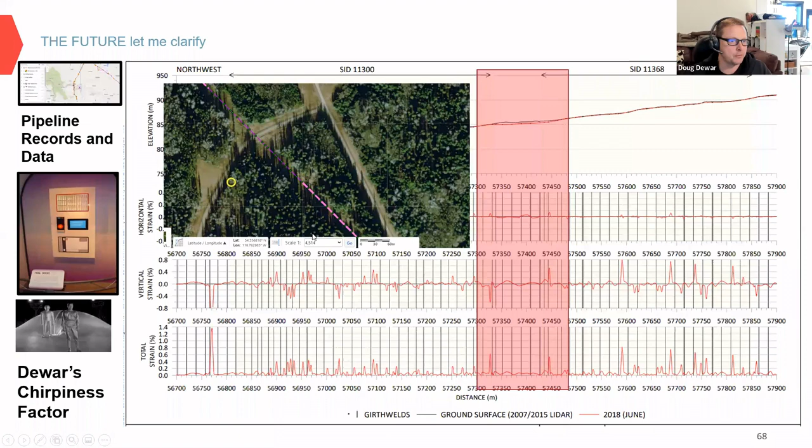Okay, so let's talk about the future. What I think we're going to see going forward is less subsurface investigation with characterization as we bring this IMU stuff on board and use it.

I also think there's going to be further development in LiDAR and INSAR stuff for pipe monitoring. There's going to be refinement of the axial strain tools, and we're going to go towards that one tool I talked about. And I really hope I can be part of this: further refinement of how we interpret IMU data and caliper data incorporated into geohazard management programs.

And the sunny thing I want to say is mitigations. Over my career, the certainty of completing an HDD, and we can complete them longer now, is becoming better. So I always recommend hazard avoidance rather than risk control by slope stabilization, surface pipeline segments, and that is becoming more of an option at more locations.